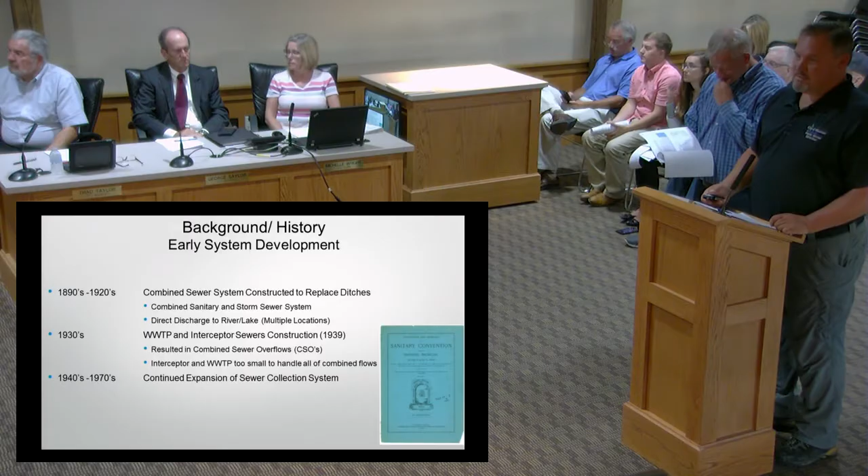Good evening. We've given many of these presentations to City Council. We took this PowerPoint from the June 2016 meeting where we presented information to Council, and I'm just going to go through some of the highlights in it. The sewer system in Manistee was actually first constructed in the 1890s. It was decided in 1888 that they would build that sewer system as a combined system, which means it carried flows from all the houses and businesses, but it also took in all the stormwater.

And back at the time, they thought that was a wonderful idea because it flushed the pipes out. When that system was built, it had direct discharges straight to the river, straight to Manistee Lake. There was no treatment. All it did was take the waste from your house and put it down to the river. In the 30s, about 40 years after that, the state, the world, the EPA started to recognize that that probably wasn't the safest thing to do. And so the first wastewater treatment plant with primary treatment was built along Manistee Lake. And then a series of pipelines were built along the water courses to intercept the flows that had previously been going to the river and the lake.

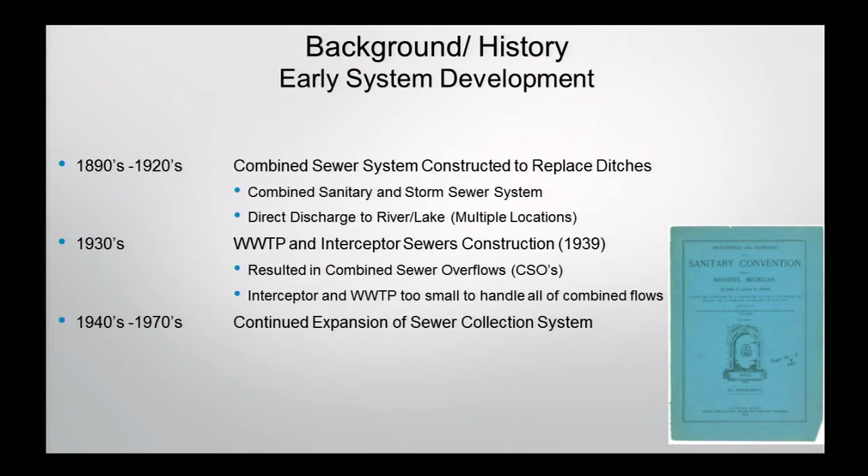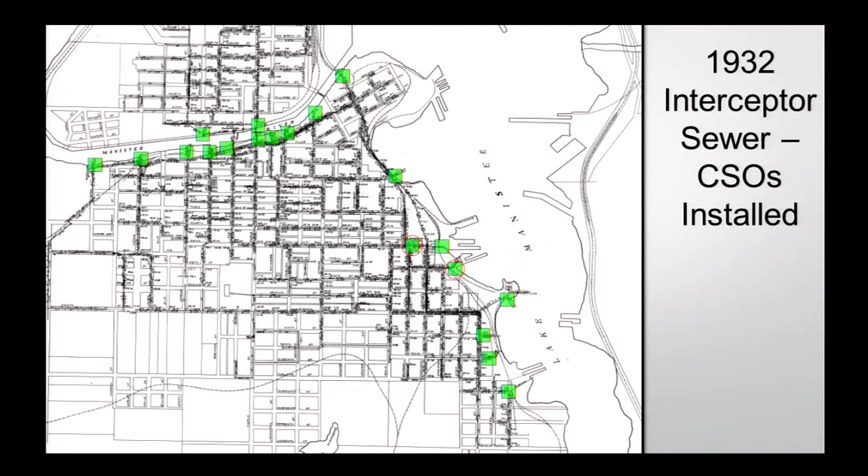The pipes and the treatment plant were not built with capacity to handle all of the stormwater flows, so they essentially were sized to handle the daily sanitary flows, and then overflows were placed in that system. These green dots indicate some of those locations. Overflows were placed in that system, so when it rained, when we had wet weather events, and the capacity of those pipes was exceeded, then the combined sewer overflowed into Manistee Lake and the river.

Back in the early 70s, the city was under direction from the DEQ, as they were doing it to all the communities that had combined sewers. They were starting to push communities to, not necessarily separate their sewers, but to start eliminating the sewer overflows. Some communities separated, like Manistee did. Some built retention basins where they could store the water and then treat it over time, and many did combinations of those.

In 1996, the city entered into a 20-year fixed date schedule to eliminate all the remaining combined sewer overflows. And the reason the city entered into that fixed date schedule is because it then gave the city eligibility to apply for low interest loans through the state revolving fund. In 2012, the last sewer district in the city was separated.

However, in 2013, still 2 years ahead of when the final CSO needed to be eliminated, it was very evident that the treatment plant was receiving high flows during wet weather periods, both during snow melts and during storm events. So meetings started with the DEQ out of the Cadillac district, and we started discussing what options do we have, because there's no way that we can close that CSO without having negative impacts to our system. And we've had this in our capital improvement plan. You've seen it in there for years.

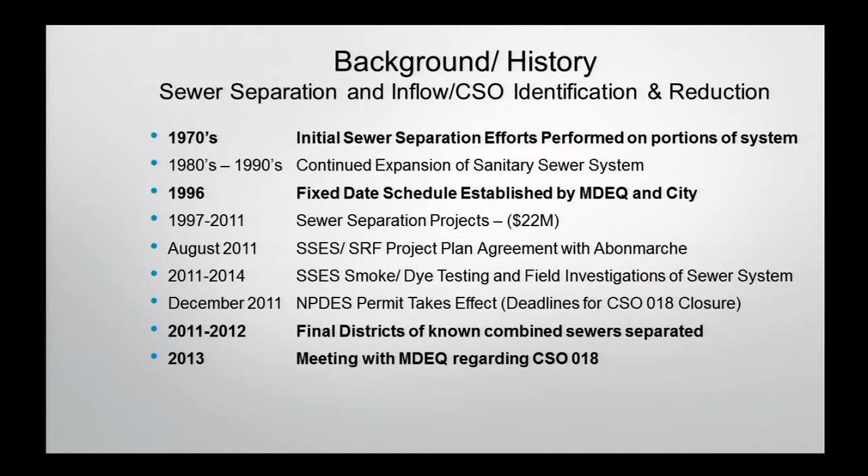Closing the final CSO is only about a $50,000 project. It is literally taking an existing concrete wall and building it taller to the top of a chamber so that the sanitary sewer in that big vault is separated from the storm sewer. That's a very easy project. The problem is that it creates basement flooding, and I'll get to some of that in a little more detail in a minute here.

When we went through the negotiations with the DEQ, there were several options. The state could issue an administrative consent order that said the city must do this stuff and it must do it by these dates. They could have renegotiated the NPDES permit to allow for extended time frames on that closure. That's originally what the city's position was.

And what the state decided to do after lots of consultation with experts in Lansing and across the state was to handle it at an administrative level, because the city was not able to close that final CSO within the previous permit. They decided to not enforce action against the city because of it, because they understood the issue. They understand that the separation efforts had not succeeded to the level that had been hoped, and they were willing to take the next step with the city when the next permit was put in place.

So in 2016, we negotiated the new NPDES permit. That gives us all our parameters for how we operate the plant and the system, the discharge levels, the testing requirements, but it also has specific sections that refer to our CSO, and it included a new program, which is the wet weather corrective action program.

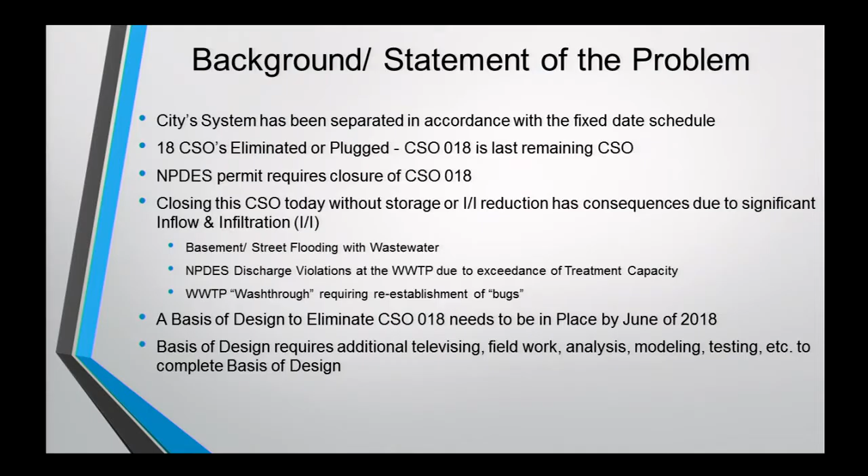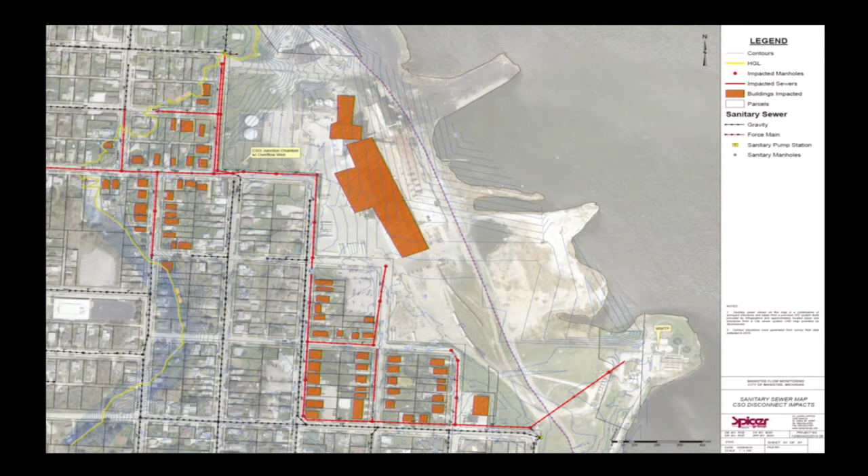This is a map that we've shown you before. Spicer put it together. The orange buildings that are colored in are all the dwellings that for sure would have backups in it. I'm tracing a yellow line, which is what we call a hydraulic grade line through the sewer system. The treatment plant is right here, and the CSO we're talking about is right here. When the flows at the plant exceed about 1.7 million gallons, we close a gate at the headworks that starts to back up the sewage through the whole plant. So this whole area down in the eastern part of Manistee would have the sewers surcharging, which obviously could cause basement flooding.

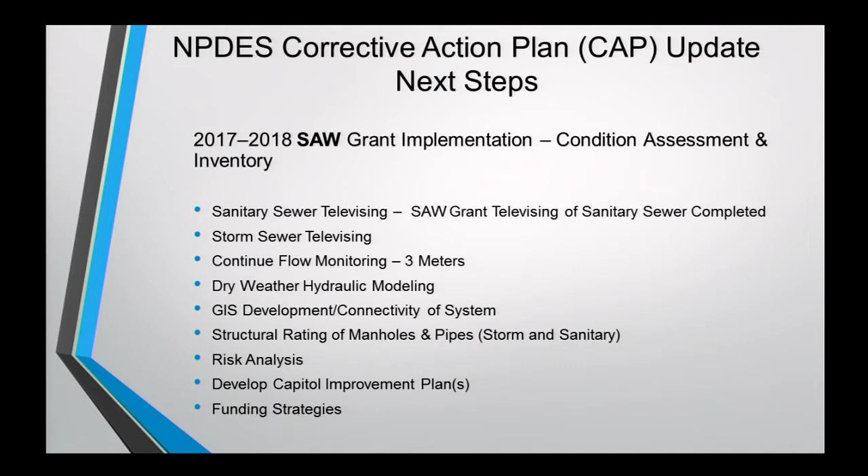And we're weighing that against its risk. There's certain parts of the system that are more risky. We'll weigh all that out so we can rank projects, based on their risk and impact to the system and how likely they are to fail. It ultimately will be put into some form of a capital improvement plan. So that's on the SAW grant, and that's ongoing as we speak.

The other parts of the corrective action plan under phase 1 that are not in the SAW grant include these items, which focus on inflow and infiltration. The SAW grant was not focused on that area. So we need to complete the remaining televising, which is approximately 18 miles—actually, we think it may be a little less than that based on our latest calculations and the data.

We'll be doing what's called wet weather hydraulic modeling, actually simulating these CSOs and inflows into the system. We'll continue to flow monitor throughout the period. We're analyzing, and have been analyzing, a lot of data at the treatment plant in terms of how much is inflow, how much is infiltration, looking at individual storms.

In September, if we have funding in place, we would perform smoke testing throughout the city. Rural Water works with communities—they perform the smoke testing, and we would go around the whole city putting smoke into the pipes and monitoring where that smoke comes out. If that smoke comes out of a roof leader or a gutter, that's obviously a connection in the sanitary sewer system that has stormwater coming into it. So we would note where it is and know that we have to go back and address it.

So that would be happening in September if we have funding in place.

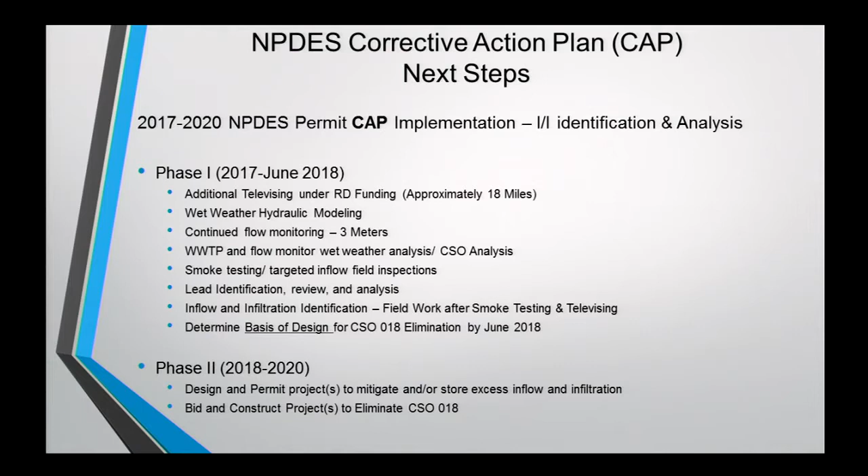So with that, I'll turn it over to Ed to talk about the bonding process.

So tonight you have in front of you an agenda item which is called a notice of intent resolution. Prior to bringing this forward, we had to determine how we were going to finance this corrective action plan. And it's looking at this point that we'll probably be doing it in one phase, an early phase, and then probably phase 2 or 3 down the road. The first phase will likely be market rate revenue bonds. That will get us the funds necessary for Sean to complete the investigation so he can complete the basis of design. And then phase 2 and/or 3 we would be going to USDA rural development in order to get the funding to actually construct whatever the solution is determined out of phase 1.

So the notice of intent resolution is in front of you tonight. All that does, as Bond Counsel Pat McGow said, is it's the very first step in the process, and it sets the 45-day referendum window. So if that's approved tonight, then we would publish the notice of intent resolution and wait to see if there were any petitions received. If a referendum was to occur, it would require a petition signed by 10% of the registered voters in the city of Manistee, which is just below 500.

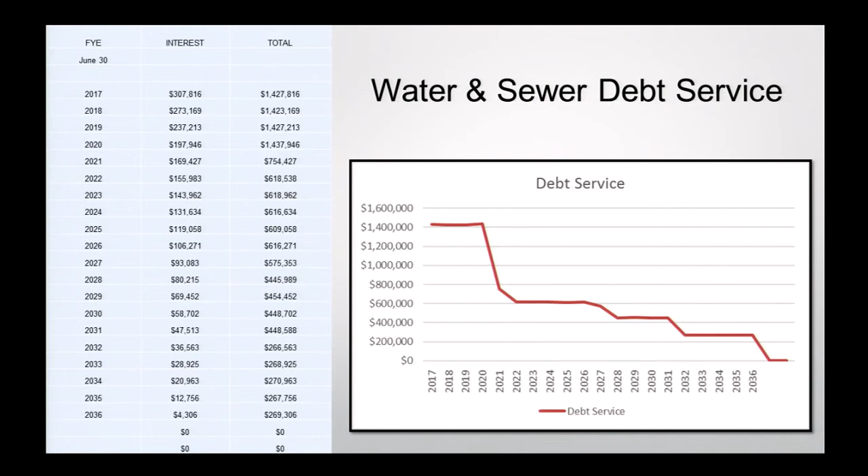This chart just kind of demonstrates that. You can see in fiscal year 2021 we have that sharp drop off, and that gives us the capacity to absorb more debt to comply with state requirements. It's important to note this isn't something the city wants to do on its own. It's being forced on us by the state and ultimately from the EPA, so it's something we basically have to comply with. With that, I'll turn it back over to Sean to summarize where we've been.

I guess just in closing, I think we've covered everything, but one thing we were talking about this morning in our staff meeting was that the low-hanging fruit has been picked. We've gone through the last 20-some years and got a lot of the easy stormwater out of the system. By separating sewers, that took care of a majority of it.

We're literally down to what I looked at, the last CSO we had, trying to get a handle on how much water is really going over that weir. The last event was 2.3 inches of rain as measured at the treatment plant, and over the city's footprint that generated about 160 million gallons of water. Of that, we had 1.4 million gallons go over the CSO, which we definitely want to get rid of and don't like. So it's a little less than 1% of all the rainfall that made it through the system and over that weir. The other 99% went either where it was supposed to, through the storm sewer to the rivers or the lake, or through the treatment plant.

So getting that last 1% is hard, and the DEQ is not letting us off the hook. It'd be nice to say we're at 99%, but we're not getting let off the hook. So it just kind of puts things in perspective.

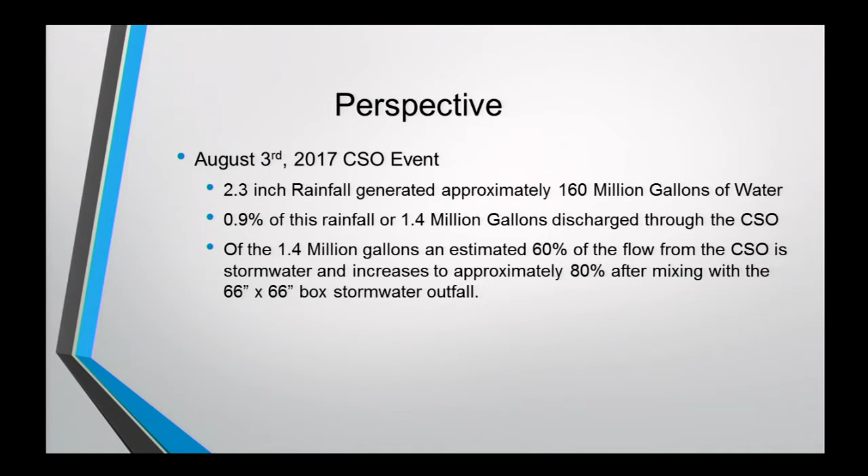We need a motion on the agenda item before we go into discussion. I'll make that motion. I'll second it. I have a motion by Councilmember Whitmore, second by Mayor Pro Tem Zelinski. Now we can go into discussion.

I have a question. Looking at the capital improvement plans that we approved this year, I looked at the water and sewer, and what I'm coming up with in costs that we've set aside for capital improvement is not 25 million. It's more like 11 million. So how did we get from when we approved the budget at 11 million for capital improvements to 25 million? What did I miss, and where is it?

Well, as Ed pointed out, the debt drops off in about 5 years? 2021. So the money that's available today is what we've included in that 5-year capital improvement plan. We forecasted out what's available in the next 5 years each year, and we've included those water and sewer projects in those. When the debt drops off is when it opens up for more projects to happen after that.

I don't think I'm quite following you. You put aside 5 million in capital improvements for the basin already, and 5 million to seal the infiltration problem. So that's 10 million. Right. Well, we've put those in the capital improvement plan as a placeholder, but that doesn't identify how those are being funded yet. Okay, but if we're going to raise 25 million, I'm sorry, I thought the capital improvement plan meant this is what we estimate the cost to be for the basin, this is what we estimate the cost to be for this other thing. So how do we get to 25 million?